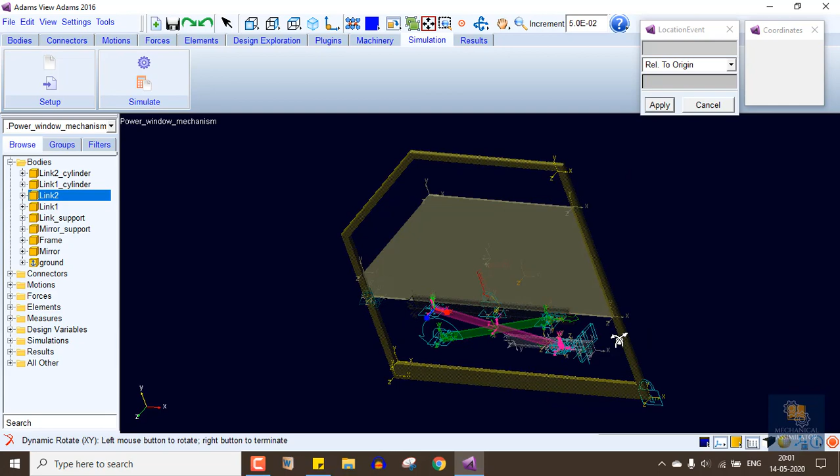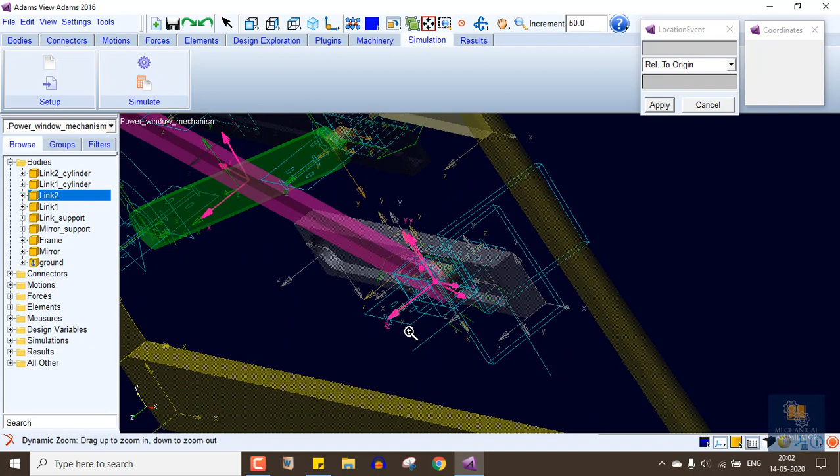Link 1 in green, link 2 which is in pink, and here we have another link support for the link and the mirror support here, this one. And in the same way we have another cylinder which is this.

So let me show you the connections for this. Joint 1, which is a rotating joint. Actually there should be a gear that rotates with the help of a motor, but that is replaced with the rotating motion that has been given to the joint.

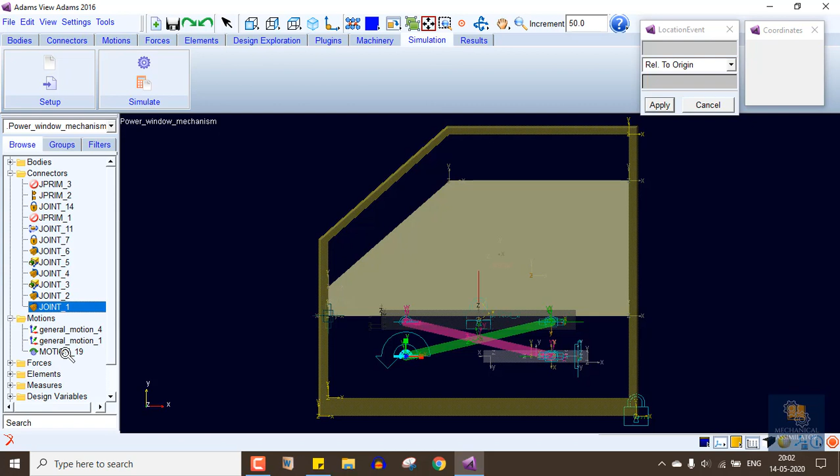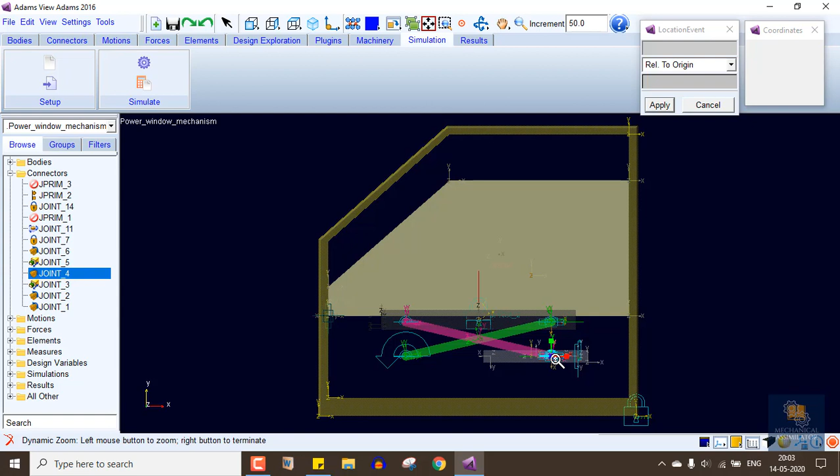And then the second one, that is another rotation joint. A sliding joint has been given for the link. As it proceeds up, the link moves to the left of the support. There is another motion at the same point for the rotation as well, and there is a translation joint that has been given for the point over here.

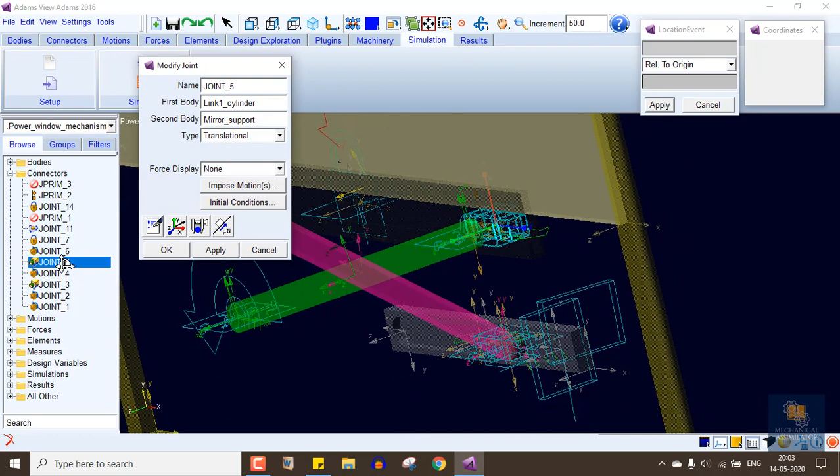Here, that is given between the cylinder and the mirror support. The rotation joint has been given for the cylinder, for the link and the cylinder. Basically, the cylinder moves translationally, and the link moves in a rotation in the form of a rotary link.

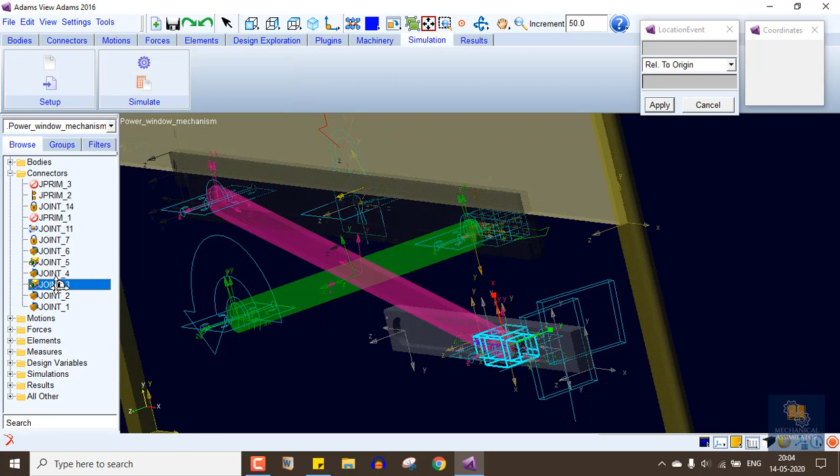The same way happens with this link also. A rotation joint has been given for the link and cylinder, and a translation joint between cylinder and the support.

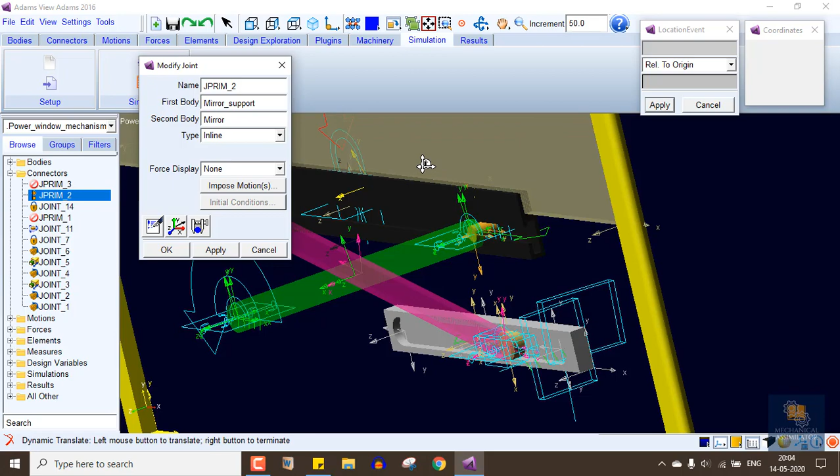Now an inline joint has been given between mirror support and the mirror. Let me show you. This is the inline joint.

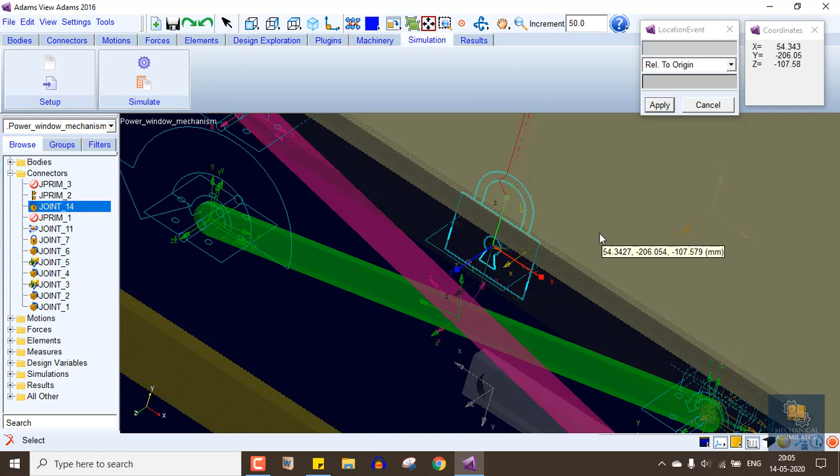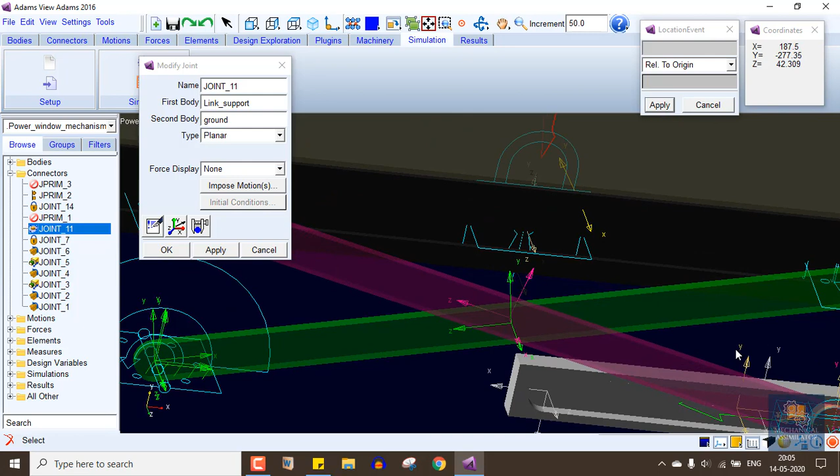Next, a fixed joint has been given so that the mirror will be attached to the mirror support. See, that is been given for the mirror and the mirror support. There is a planar joint that has been given for the mirror, another support, link support here. These are the joints and the bodies.

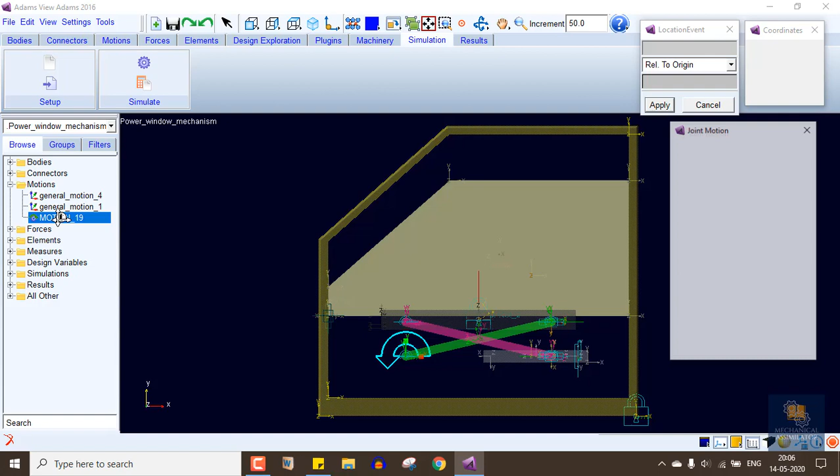So a motion has to be given for the translation in the x-axis, and the translation has been given for another motion, and a rotary motion has been given for this. So these are the motions.

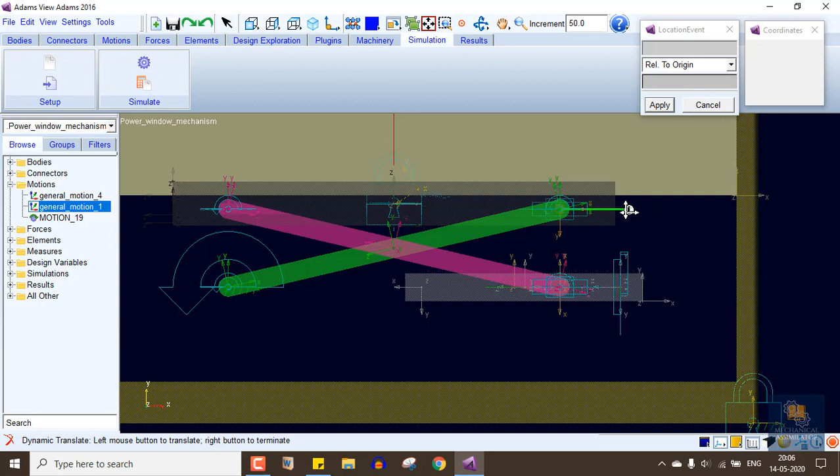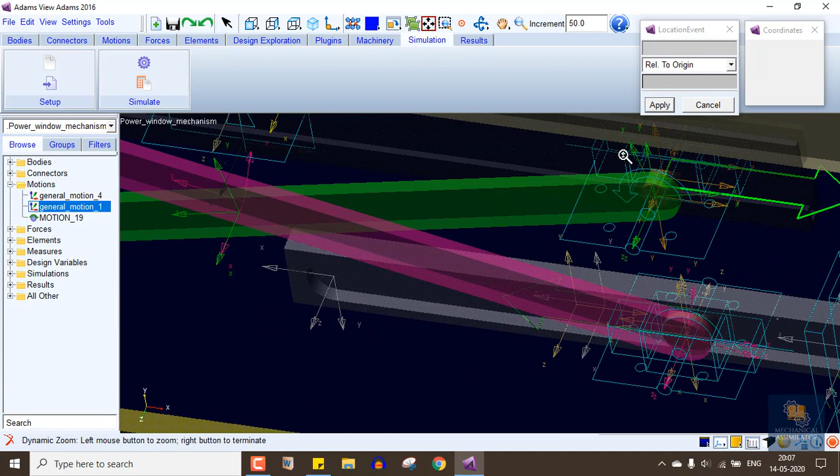The motion direction has been given, which you can see over here. See the green line that is indicating the left side of the motion, and this moves to the right of it. Oh no, that is also to the left of it. I gave a minus sign. Okay, it moves to the left. Both move to the left basically. The direction you see is because of the local coordinates.

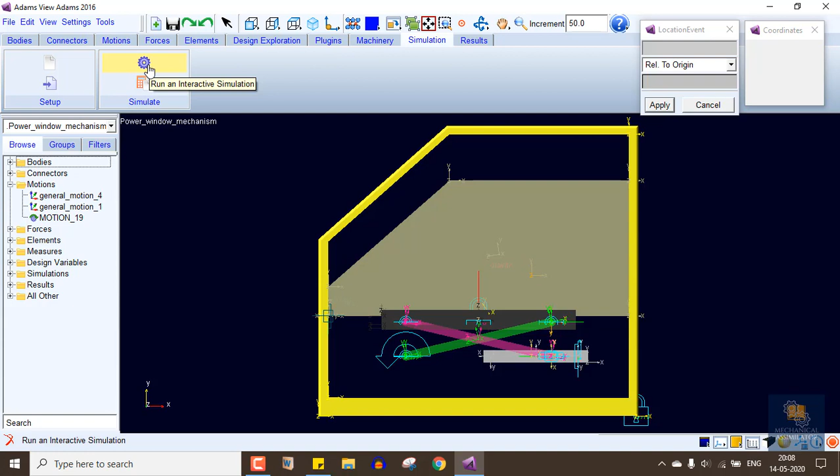So now I tried my best to give the motion value, but there is a lot of room to change the motion, and even optimal has not been taken. It has to be worked on more, but the possible or the best of work I could do is this motion. Again, I would like to say that this is not the optimum motion I wanted it to be, but this is the best I could do with my little knowledge.

Okay, let's move on to the simulation. See, there is a motion. That is it from my side.

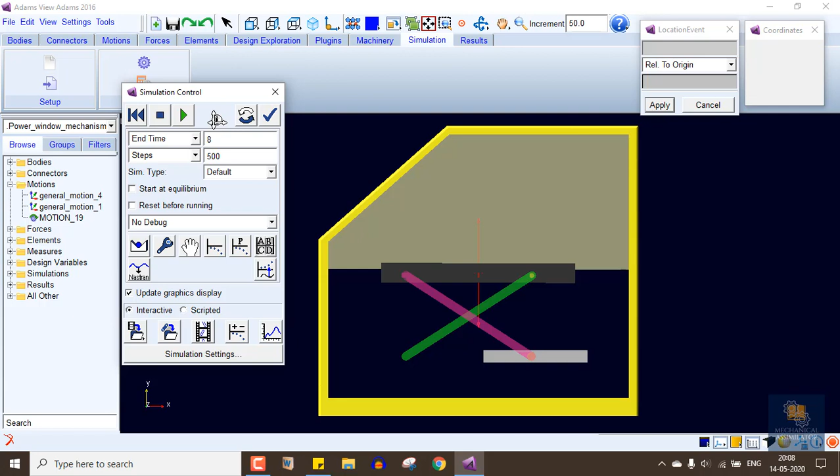If there is a not optimum motion, that I already told you, but if you have come up with a best solution, I would appreciate that. Thank you.